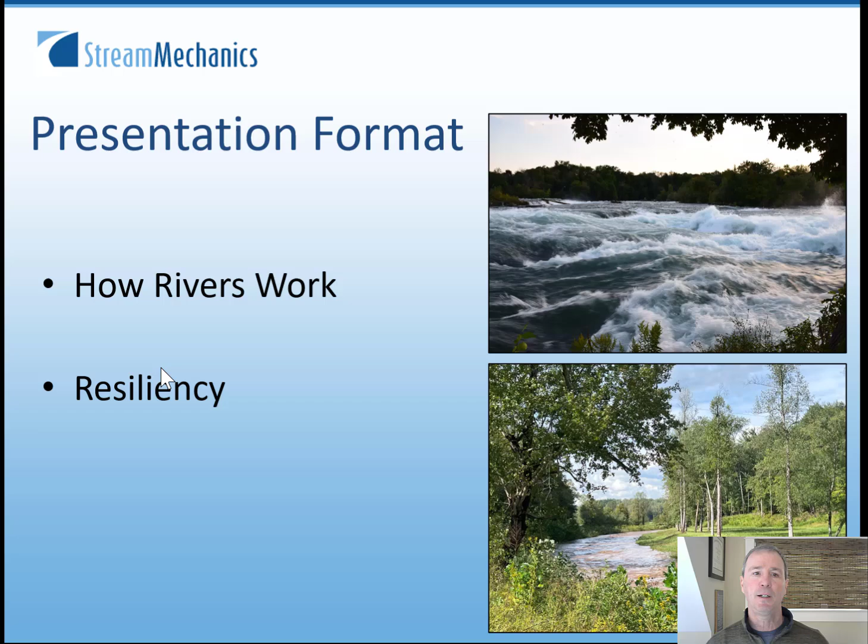This presentation format: I'm going to spend a little bit of time just on how rivers work, a very simple look at that, with a focus on how streams work during these big floods. Then after I get some fundamentals defined, we'll move into the resiliency part.

First I just wanted to talk about the power of water, because I think we've all stood beside a river at some point and marveled at the power of water. In this picture I'm standing beside Niagara Falls on the American side. The ground is shaking as this water pours over the falls.

In our world we can quantify stream power. This is one of the more simple ways to do it: we take the weight of water, which is pretty heavy, 62.4 pounds per cubic foot, times discharge, which is just the stream flow. In the picture, that volume of water moving over the falls is discharge, times the slope, which is just how steep the river is, the gradient. So as we increase discharge and/or increase slope, we increase stream power.

For those of us in North Carolina, we've seen some big floods in our state: Helene in the mountains, and not too many years ago Florence in the eastern part of the state. Both were very big flood events, but the behavior of the water was quite different. Florence was mostly in the coastal plain, so that water just kind of came up like filling a bathtub. It had pretty low power because it had such low slope.

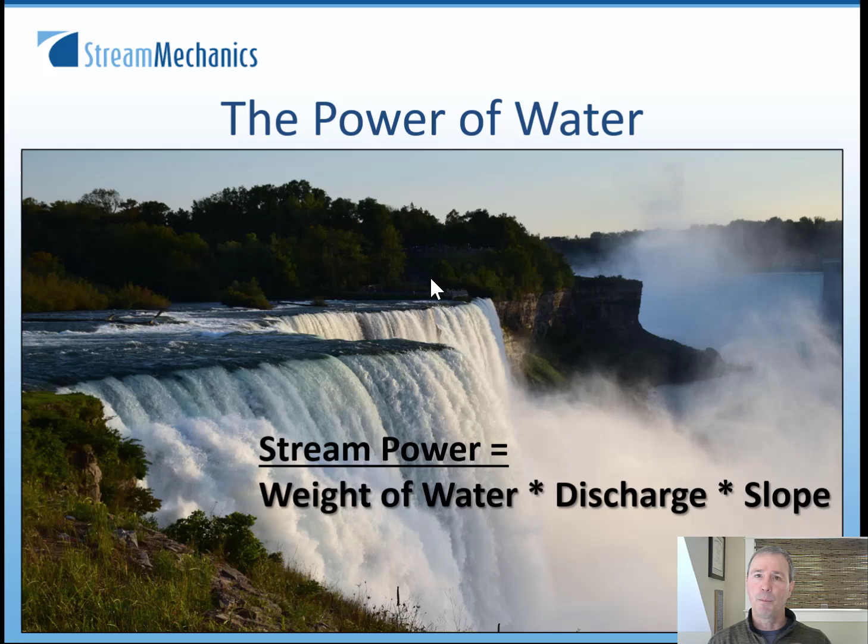Compare that to Helene, where we dumped almost 30 inches of precipitation at max onto a mountain environment with steep slopes. The power of that water was tremendous.

I also want to talk about an equation called shear stress - this is the last equation, only two equations in this presentation. Shear stress is a component of stream power. We have that weight of water again, shown as gamma, and we still have slope, that's the S, but now instead of discharge we're just focused on depth. Shear stress is a force we use a lot in stream restoration design, because we can manipulate the form of the channel and the floodplain to affect it.

Shear stress is a force. The lower that shear stress, the less force there is to move certain particle sizes. Low shear stress moves things like sand-size material, maybe small gravel. Large shear stress can move bigger gravels, even into cobble, even into boulder-size material, if that depth and slope are high enough to do it.

You can see an example of that in this slide, a little basket here. We went fishing for rocks. We had an event come through, a flow event. We came out after that flow event, dug through the sands, silts, and gravels in our basket, and that last picture shows the largest particles that were moving during that event. So that's really what shear stress is used for, the force for a given flow that can move particle sizes.

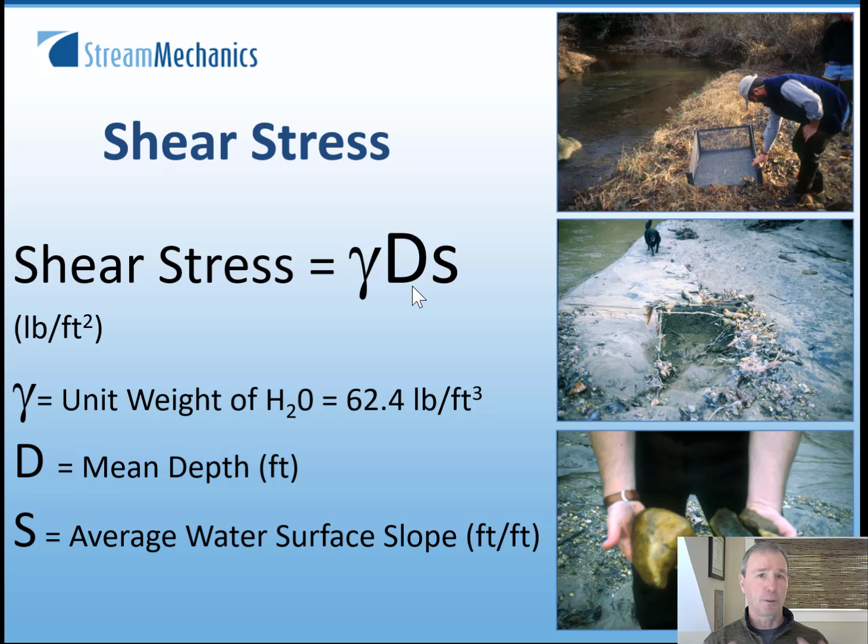So we start putting this together. With great power comes great, well, responsibility if you're Spider-Man, but if you're the river, it's sediment transport. Really, when we talk about sediment transport, we're talking about erosion and depositional processes. We think about these big floods as that water is increasing. We've got the precipitation event, runoff starts, water is flowing into our channels. The depth of that flow in the channel is increasing. It's increasing shear stress, increasing stream power, and we often get erosion of the stream banks, maybe erosion of the bed. In the case of Helene, we also had landslides that were bringing material in, and the river is working that material.

So there's a lot of erosion, especially on the front end and the peak of that flood. And then as the water begins to recede, stream power and shear stress go down, and we get a lot of deposition. Often after big flood events, when we're walking those sites, we see a tremendous amount of deposition in the channel and on the floodplain.

You can see an example of that here. This is from Helene. The picture in the upper left is before Helene. You can see a little bit of bank erosion, some material over here. And then after Helene, you can just see the massive amount of material that was deposited on that falling limb of the flood.

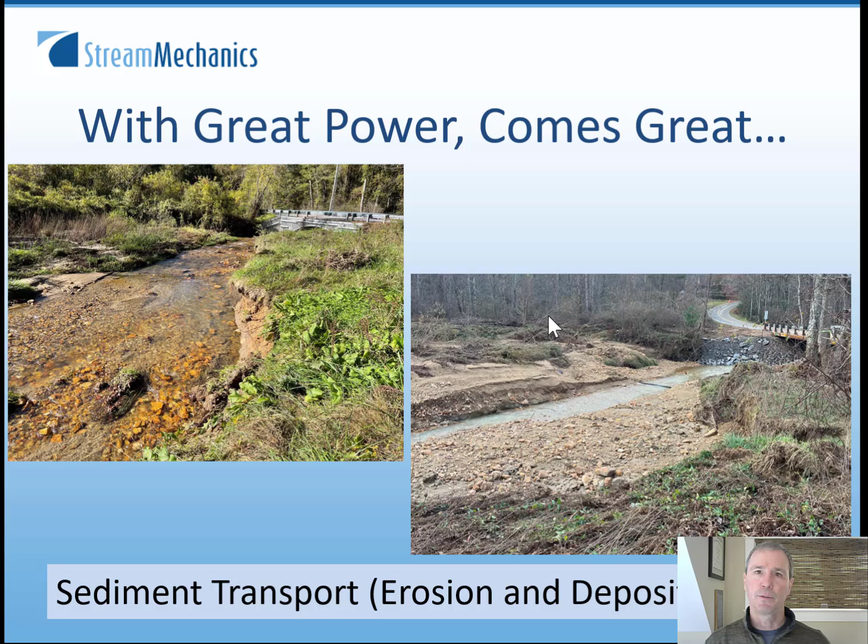All right, so I think this is a nice schematic to start putting these two things together. This is a diagram that was put together by Emory Lane in 1955, and it just shows that if we're going to have a stable channel, we have to have a balance between stream power over here on the right and that sediment size and sediment supply over here on the left.

So as we increase stream power, again either by increasing slope or increasing the volume of the water, this arm goes down and this little pendulum swings over to the degradation side. So too much stream power, then we often get degradation. I don't love the word degradation because we use it for a lot of things, but in geomorphology, degradation means erosion of the stream bed. It means the channel is going to get deeper than it naturally would be. Incision is a synonym for degradation in our world.

All right, on the other side, we have the sediment size and sediment supply. So if we keep stream power the same, but we increase the quantity of sediment and/or the size of that sediment, for example, instead of sand we're moving a lot of cobble or boulder, then this arm can go down and we move over to the aggradation side. That is the filling up of the bed with sediment, even depositing that material on the floodplain. That last picture was an example of aggradation. Again, we generally see both in these big floods: a lot of degradation in places, especially in the beginning part of the flood, and then aggradation as kind of the final result.

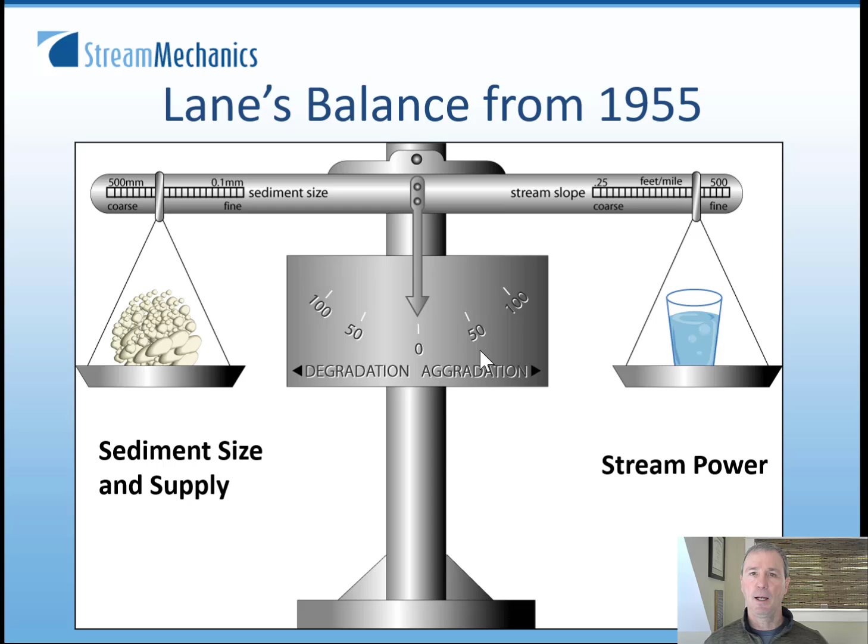All right, I also wanted to just touch on valley types, especially since I'm focused a little bit on the mountain environments, that the way this stream power plays out and really the effects of these big events does vary a bit by valley type. There are many valley types. We could spend all day talking about the different valley types that are out there. But just for simplicity purposes and to convey some of the points I want to convey in this talk, we're just going to focus on 3 valley types.

So the first is V-shaped. V-shaped valleys are generally headwater mountain valleys. They're fairly small watersheds, so small drainage areas, generally small volumes of water, but steep slopes. So the steep slope is kind of the higher part of the stream power equation, but the lower discharge is mitigating that stream power a bit. V-shaped valleys look like a V. They're kind of dominated by hill slope processes, so they're more vulnerable to things like landslides, hill slope failures, debris flows, and there's really not a floodplain that's part of these V-shaped valleys. As we move downstream, the valleys tend to open up. The slope comes down a bit.

The valleys begin to have more of a bowl shape to them, and we get these benches—little floodplain benches that form, but it's still pretty narrow. It's also still fairly steep, not as steep as the V-shaped valleys, but we have more water. So thinking about stream power, we're increasing the discharge component, but we're beginning to reduce the slope as well, to mitigate that power a bit.

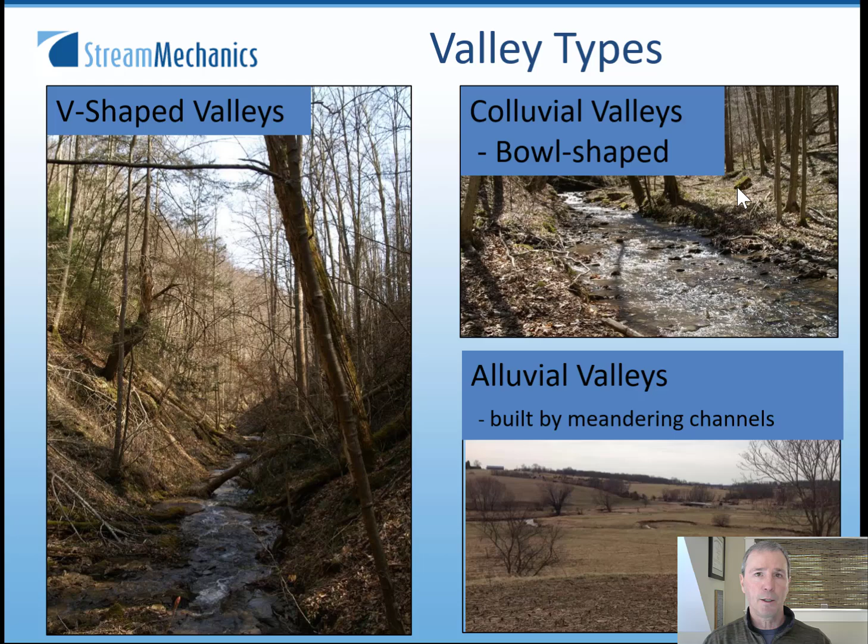As we get further down in our idealized watershed, we move into the alluvial valleys. You could think of alluvial valleys as valleys built by the river—these are the meandering streams. Alluvium is just the material deposited by the river. The valleys tend to be wider, the slopes tend to be flatter. So we're picking up more water—our discharge is increasing, but our slope is coming down.

Now I mention this because, as we were touring some of the streams in western North Carolina after Helene, we noticed devastation in all of these valley types, which is a bit unusual. Typically, those V-shaped valleys and the colluvial or bowl-shaped valleys are a bit more resilient to floods because they don't produce as much water. But when you get 20 to 30 inches of precip on these slopes, a multitude of processes come into play. So we saw really devastation in all three valley types, but they were slightly different.

This big picture on the right is the alluvial valleys—again, wider floodplains, a little lower slope, typically bigger streams and rivers. We saw extensive bank erosion in these systems, and we also saw what we call channel avulsions, where new channels were formed as either you got a blockage in one channel, or there was just too much power and it created a new channel elsewhere in the floodplain.

As we got into the colluvial valleys and the V-shaped valleys, we still saw avulsions. In many cases, the stream just began to take the full width of the valley, but we also saw increasing influence from landslides and debris flows in these valleys. So it was really a combination disaster of landslides, debris flows, and flooding.

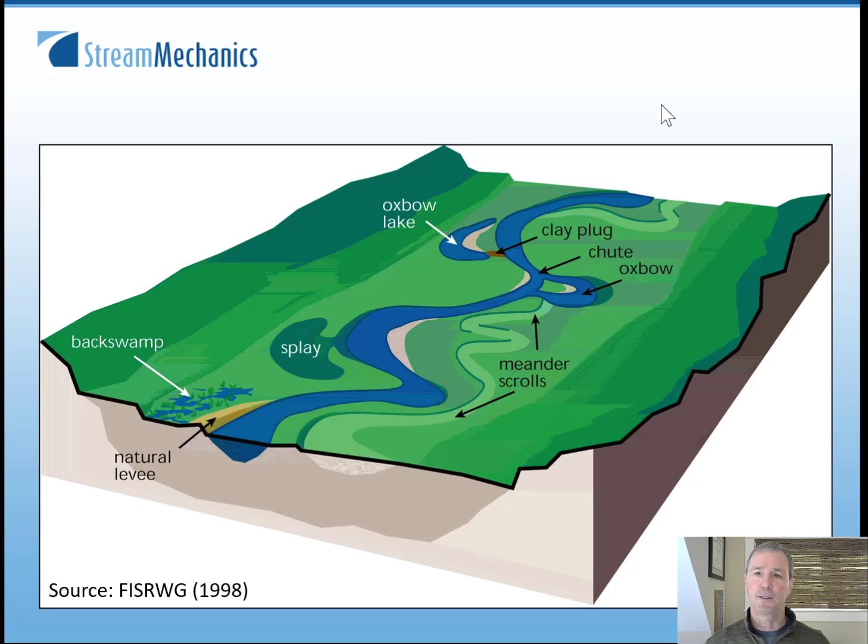But since we straighten the stream, it increases the slope, which increases the shear stress, and typically the result is degradation. So most of our streams in North Carolina, and frankly across the eastern United States and most of the United States where there are alluvial valleys, our streams are incised, or deeper than they should be, and can carry a lot of shear stress when those channels are full of water.

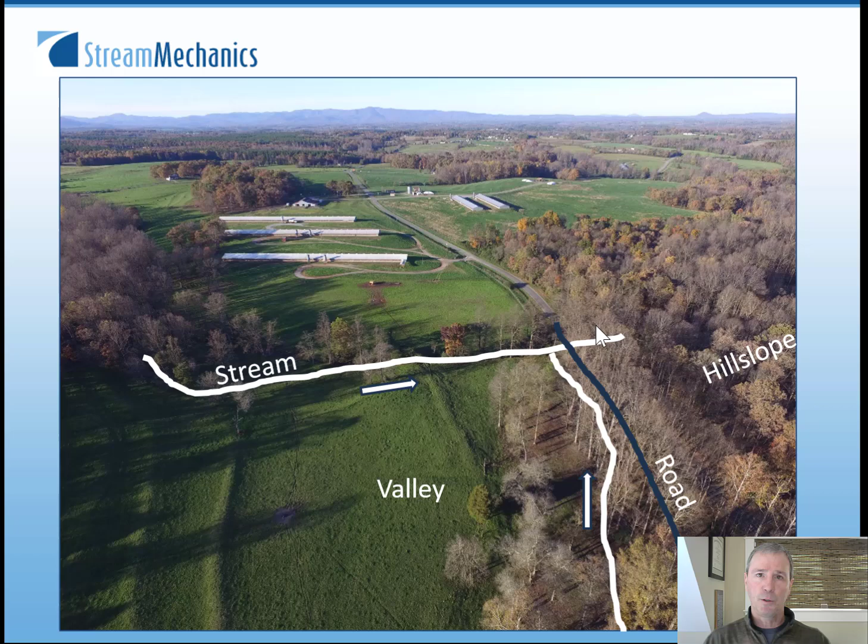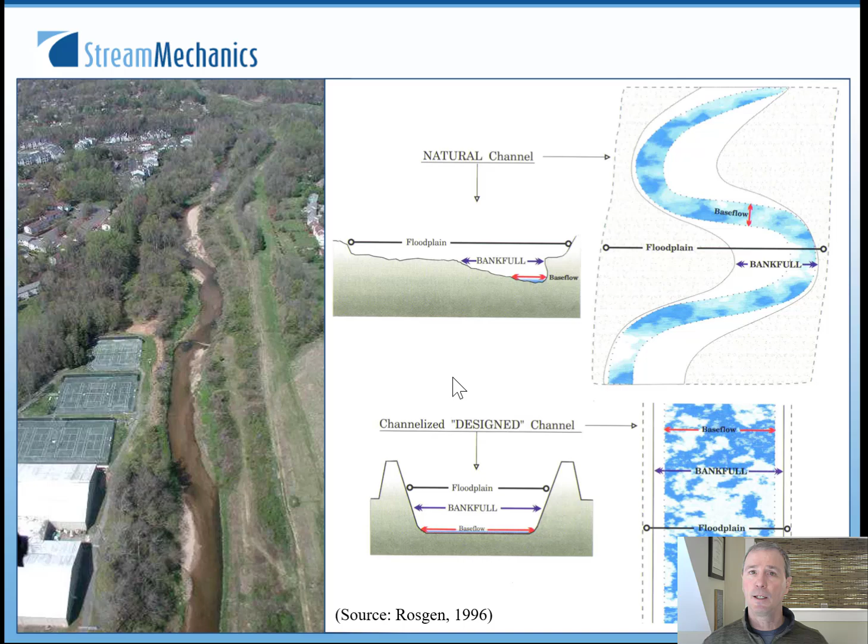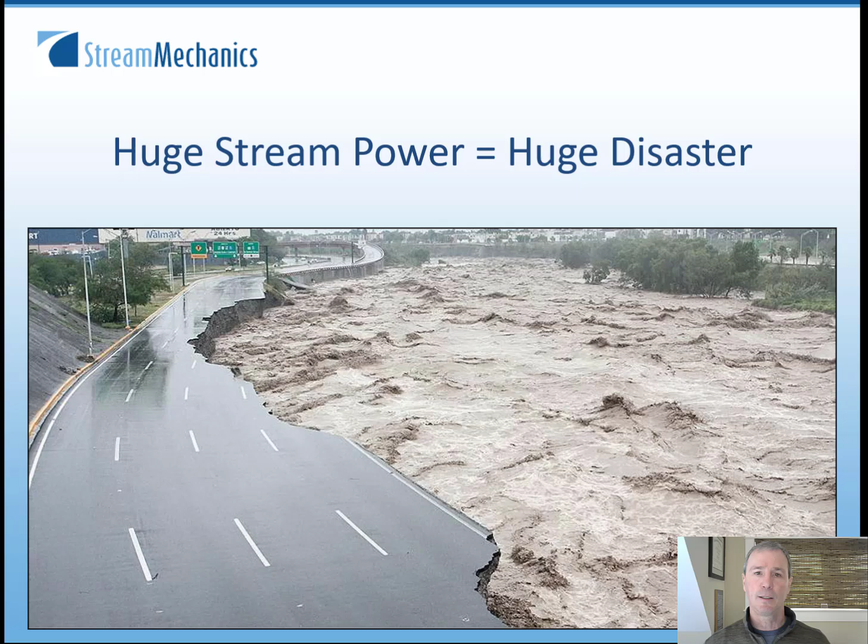All right, so that was a little bit of the processes that I wanted to convey in as simple a way as I know how to do. And so now we're going to get to the question at hand.

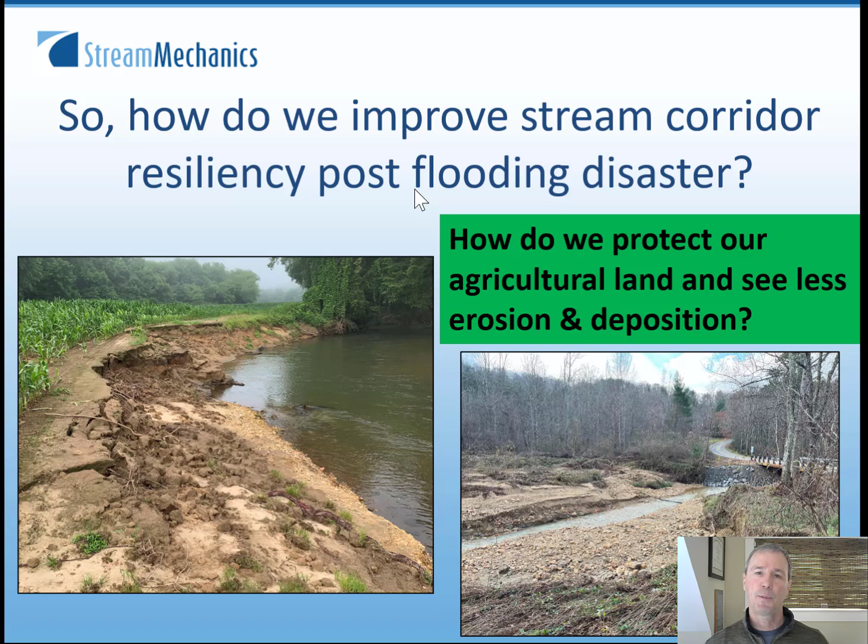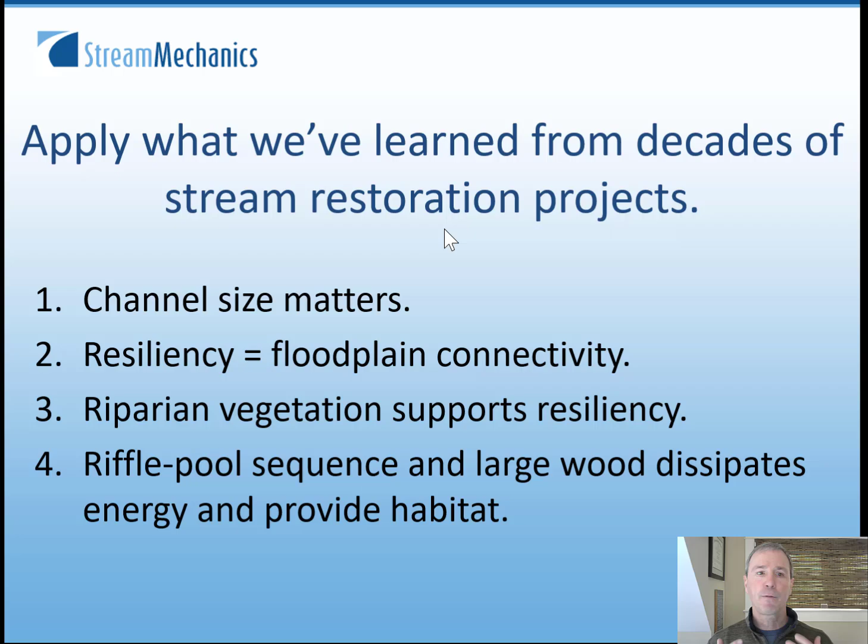So I'm going to offer 4 steps for doing this, just based on lessons learned from decades of stream restoration projects. I'm going to walk through each of these, but the first one is that channel size matters. The second is that if you want to just simplify all of this, resiliency equals floodplain connectivity, and I'll show you why. Third, riparian vegetation supports that resiliency. And fourth, a riffle pool sequence where we can incorporate large wood further dissipates energy and provides habitat.

So the first one is just channel size matters. We showed that schematic of that bankfull channel. When possible, when we have channels that have been destroyed or altered and we've got to go back and manipulate that channel, build bankfull channels, and then put the flood flows on a bankfull bench at a minimum, and preferably on a floodplain. This is really easier than it might sound if you're fairly new to this.

Because if you know the drainage area of your project, you can get the bankfull dimension. This is a for sure statement in North Carolina - we have these curves and equations throughout the state, and in many other states we have this as well. So it would be one thing to check. But if you know the drainage area, you can get that bankfull dimension. And getting the drainage area is getting easier and easier.

There are desktop tools to do both. You can just click on the site that you're working on, and it'll give you the drainage area. You know the drainage area, you can get the proper size.

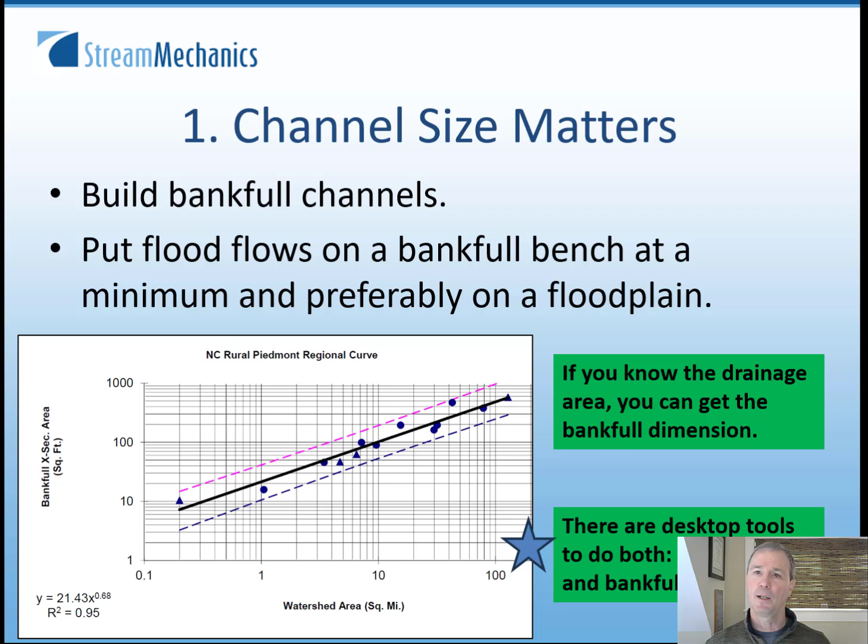So I just want to show some examples of how this plays out in the field. This is an example of a project that had a dam failure. So there was a dam here, and the remnants of Hurricane Michael several years ago, this is in Surry County, North Carolina, took that dam out. So this was a project where the new channel had to be built through those sediments that had accumulated behind the dam. And in the foreground here, you can see that bankfull channel.

In this case, the channel had already built to bankfull, so the folks were able to just kind of take this template and apply it upstream and build a bankfull width, a bankfull depth, and then build this bankfull bench. So it's not just sloped straight up to the top of bank, and there are not levees put in as well.

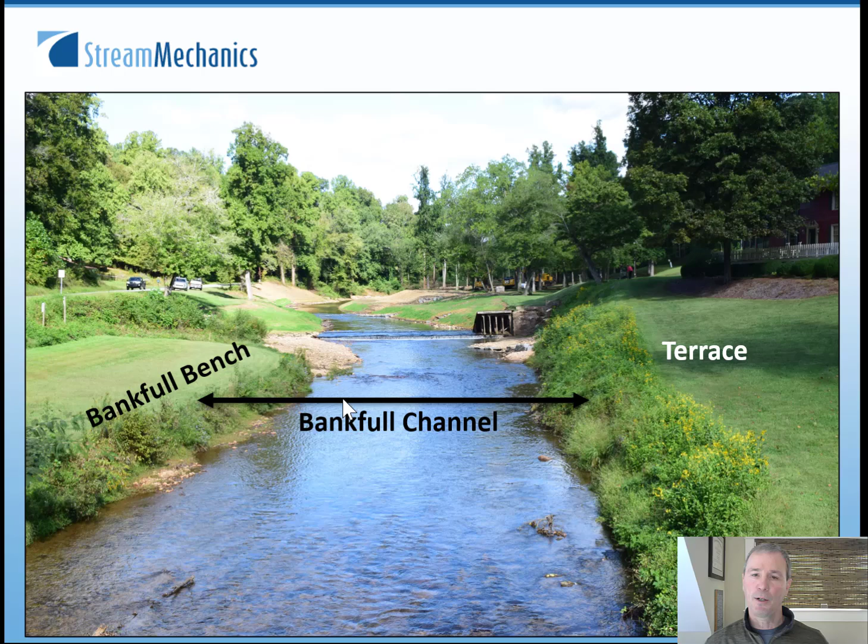This is actually the Friday that Helene hit, and this particular county is just in the foothills of the mountains. It did not get as much precipitation as up in the mountains. We did get about 12 inches of precip, but it was between Wednesday and Friday, so it was certainly not as big as some of the bigger tropical storms that have come through our system.

But it's almost right at bankfull flow here. Bankfull's right here. You can see the faster moving water in the channel, and as water hits that bench, look how much lower or slower the water's moving on the bench. And then here was the high water mark from Helene.

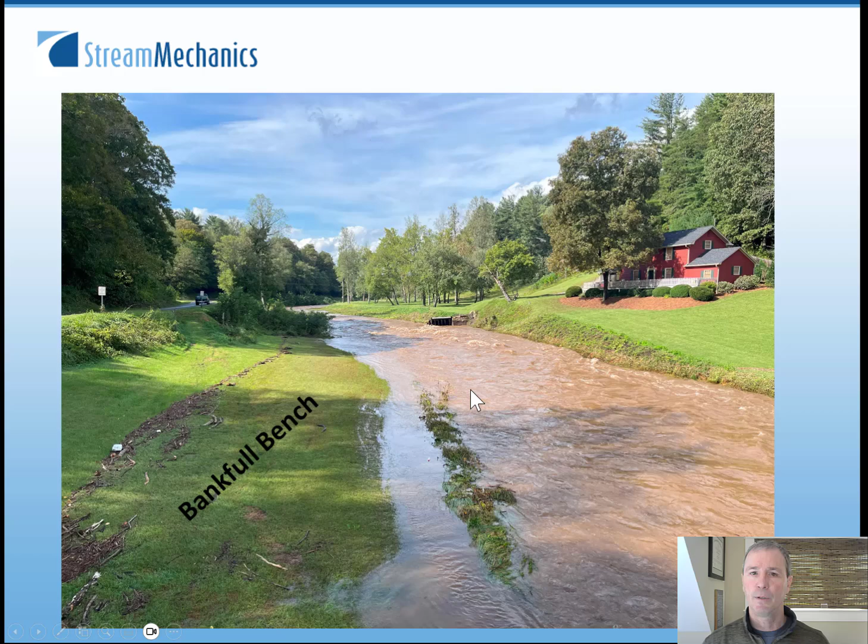Unfortunately we see a lot of this in western North Carolina right now, and it's understandable. People are just trying to survive, trying to get their land back, trying to protect themselves from the river. It seems like taking that material from the channel and piling it up on the banks to make levees that keep the water in the channel seems intuitive, right? It seems like the right thing to do, but it does not work.

The reason it doesn't work is that as we get those moderate to larger flows coming through here, we're maximizing shear stress in the channel. All of this unconsolidated material, this mixture of sands, silts, gravels, and cobbles without any soil or root material or trees to hold it in place, is just going to erode back into the channel.

It'll aggrade, begin to fill up with sediment. Additionally, this type of activity will cause flooding downstream. You're taking that water, and instead of spreading it out onto a floodplain, it's moving downstream and could flood others as well. It's also potentially a permit violation.

So there are certain things we can do post-disaster in a channel to get that initial recovery, but only to a certain point. So there's a permitting question with this as well.

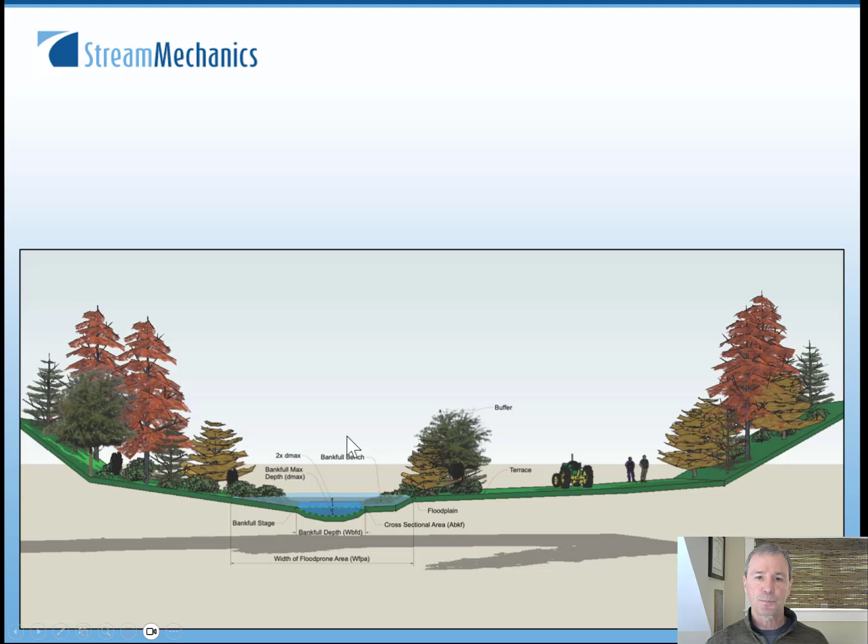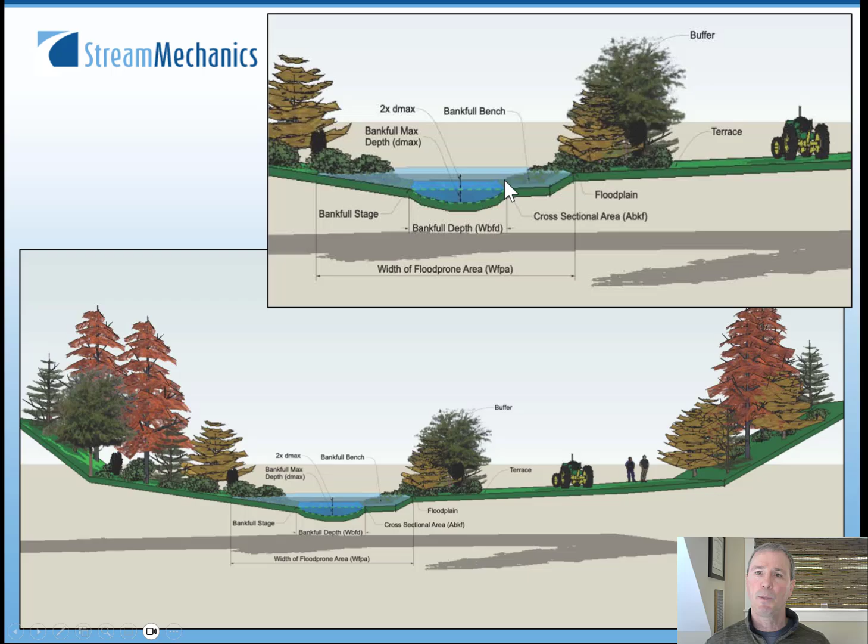But at a minimum, we could get that bankfull channel built, a bankfull bench. We're going to talk about the riparian vegetation in a few minutes, and then we can continue to farm the valley outside of that area. But reducing that bank height with this bankfull bench is really a key component.

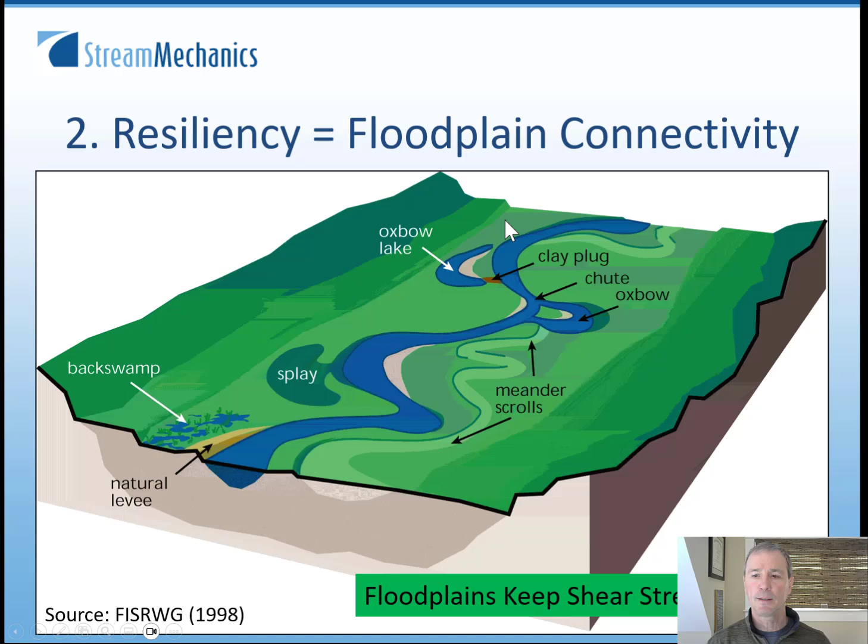All right, so number two: resiliency equals floodplain connectivity. And the reason that it does is that floodplains keep the shear stress low.

So here's a project in Banner Elk, North Carolina. This is in a county that was hit hard by Helene. This project was built in the early 2000s. It is on a farm. This part of the project was fenced out. This part of the farm was maintained as pasture land and some other ag uses. And then this part of the farm was turned into a development. But we can see a couple of things.

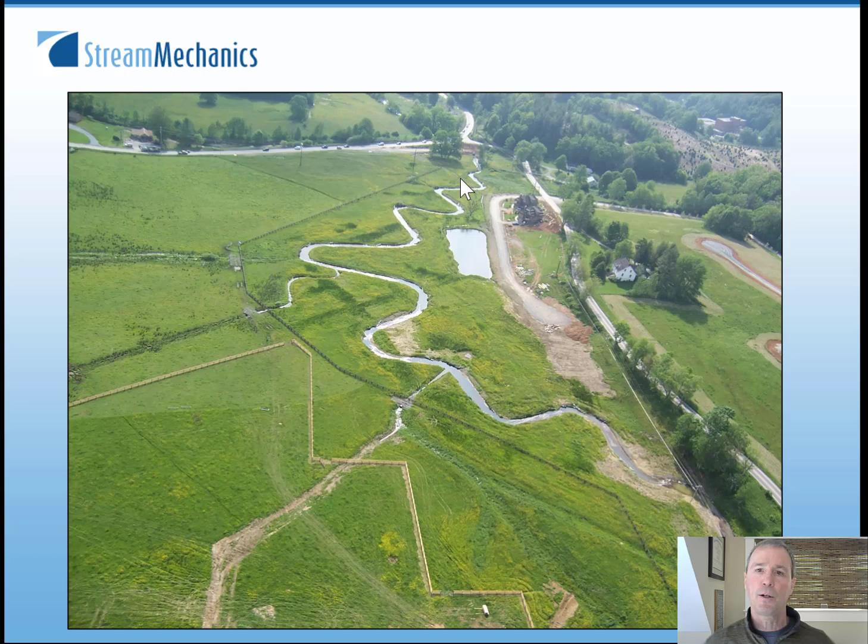We have that step one, so this is a bankfull channel. So all flows greater than bankfull can now spread out onto a wide area. In addition, there was a meandering channel put back in place, which reduces slope. So we're reducing that stream power and shear stress in two ways: by accessing the floodplain at more frequent events, and by spreading that water out onto the floodplain.

Well, there's a law with stream restoration called Murphy's Law, and Murphy's Law states that as soon as you build a stream restoration project, you will get a large flood. So a couple of years after building this project, the remnants of two hurricanes came through this site within a week of each other - Hurricanes Frances and Ivan. And you can see that event occurring here.

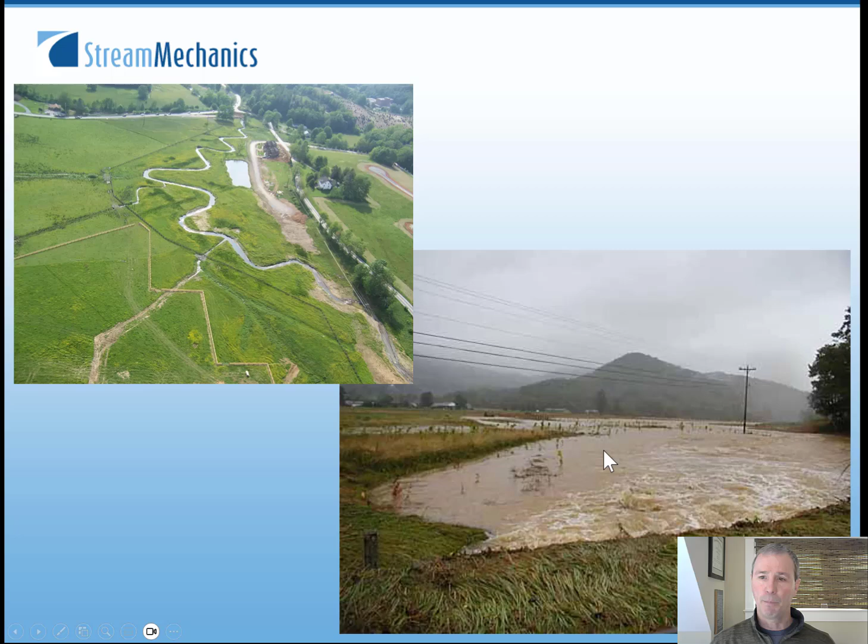This is not quite the peak. The water did go over the road, but it's still obviously during the event. What I want you to notice is the velocities and shear stress of the water on the floodplain. It's pretty low because we're spreading water out. When we spread water out, that increase in depth is minimized. So we're minimizing shear stress on the floodplain the wider we can make that floodplain.

Compare this picture to the one we showed before, where we're concentrating all of that massive flood event into one channel, trying to contain it. So this is why I say floodplain connectivity equals resiliency. We kind of don't care how much more water comes down through this system because we're just spreading it out onto a big floodplain.

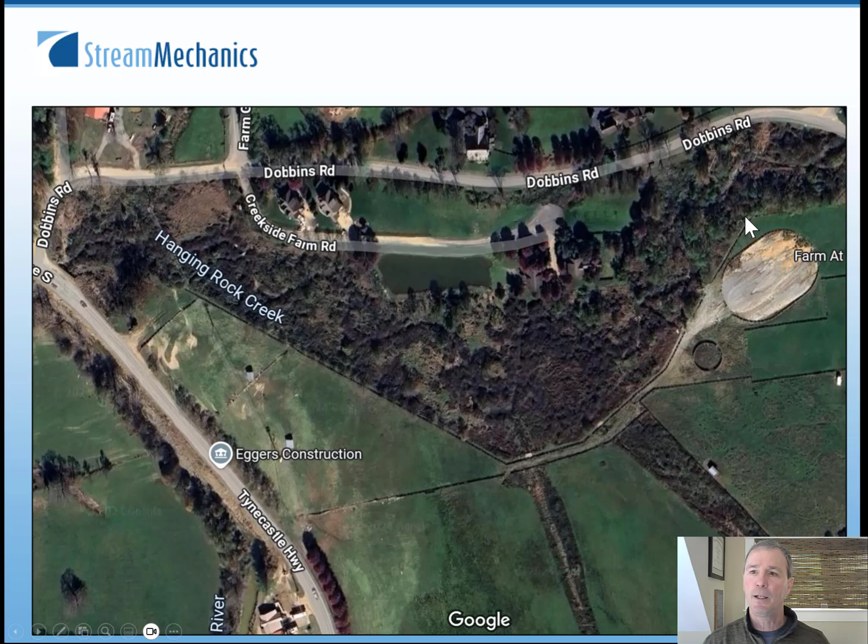And then here's that same project after Helene. So you can see 20 plus years of vegetation growth. The only real evidence you can see from the aerial of Helene is this riding rink, which had a lot of gravel washed from the rink into the riparian area. And then in a lot of places, the fence was damaged.

But when we walked that site post-Helene, walking the stream, honestly you couldn't tell a flood had been through there. The pools were still deep. The bed had not aggraded. We saw fish in this pool. There were beaver dams in one section of the stream, and the beaver dams were still intact - they had not even washed away. We had these good wetland features in the floodplain that were enhanced by the beaver activity.

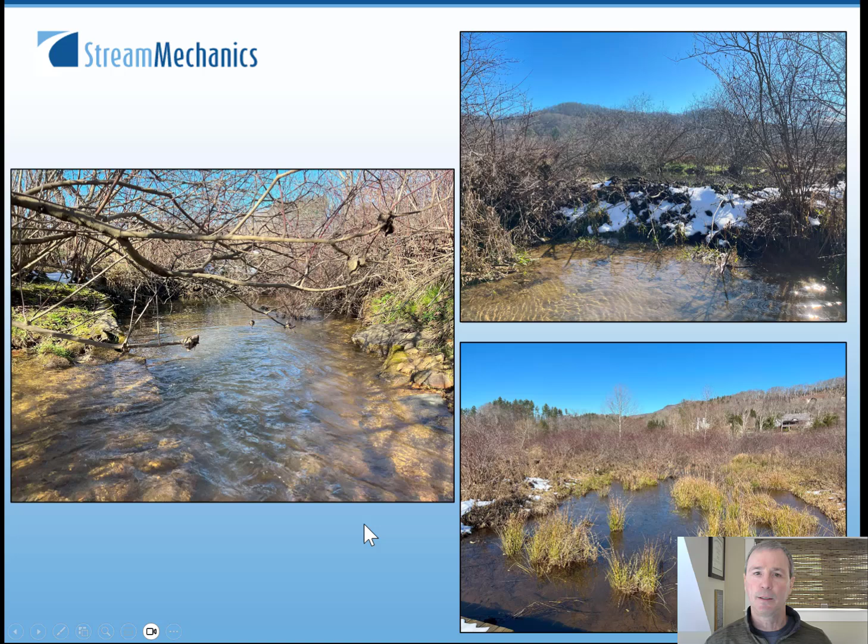Okay, so we've focused on building our smaller channels, number one. Number two, connecting those channels to the floodplain. And number three, we want to bring in reinforcements. And the reinforcements is that riparian vegetation.

We're going to focus from a resiliency and stability perspective on the fact that vegetation provides bank stability of the stream banks itself, and then it slows water on the floodplains. But there are other ecological benefits as well. It cools stream temperatures, which in western North Carolina is important. We have a lot of cold water streams that support cold water fish, and helping keep those temperatures low is important for those species.

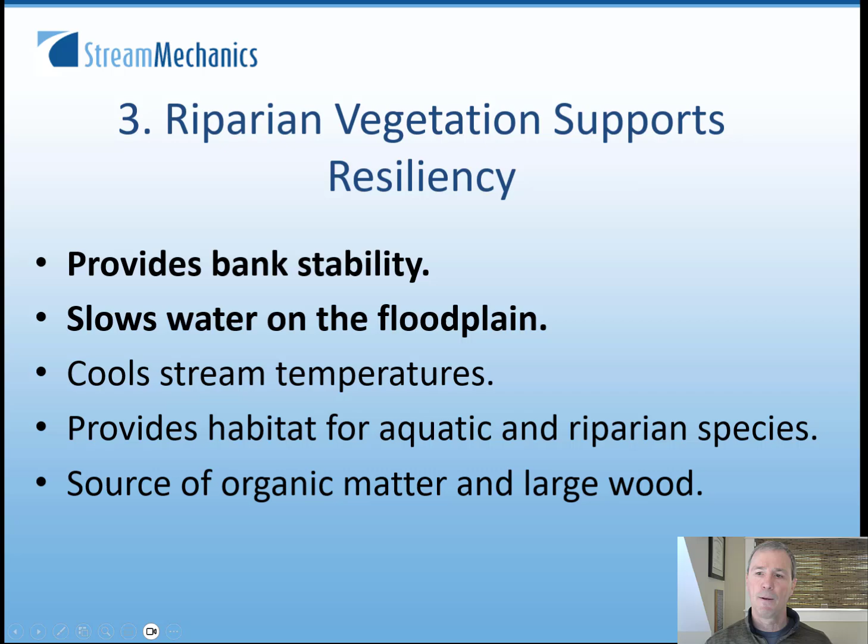It provides habitat for aquatic and riparian species, and then it is a source of organic matter and large wood. The organic matter is primarily the leaf material that gets into the stream. It's an energy source, a food source for many of those aquatic organisms. I'll talk a little bit more about the large wood in a few minutes.

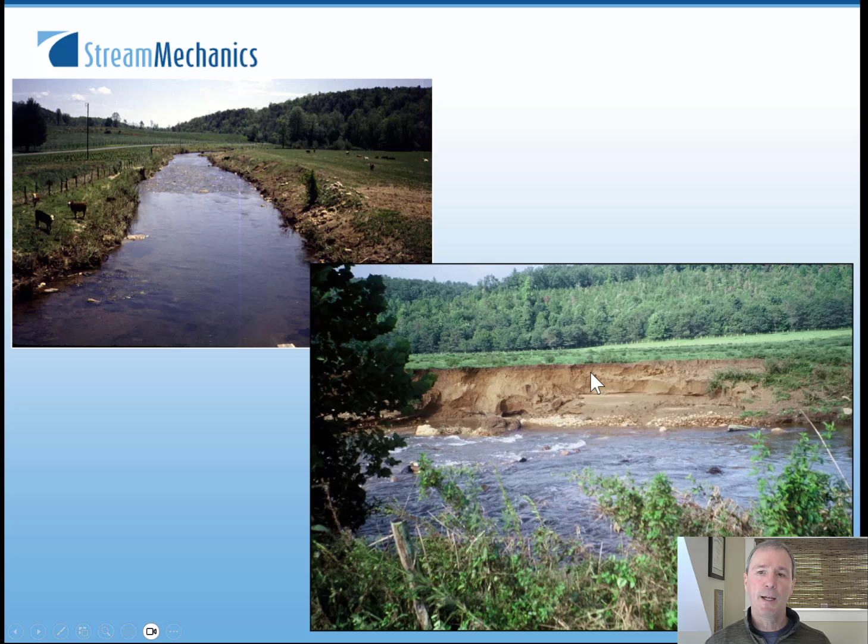So here's an example of this playing out. Here's another farm, this one in Surry County, before the cows were fenced out. We're standing on a bridge looking downstream. This bank is very tall, and over time the erosion became extensive on this project. But notice the bank heights - it's very high. Riparian vegetation is very important, but first reducing that bank height is key.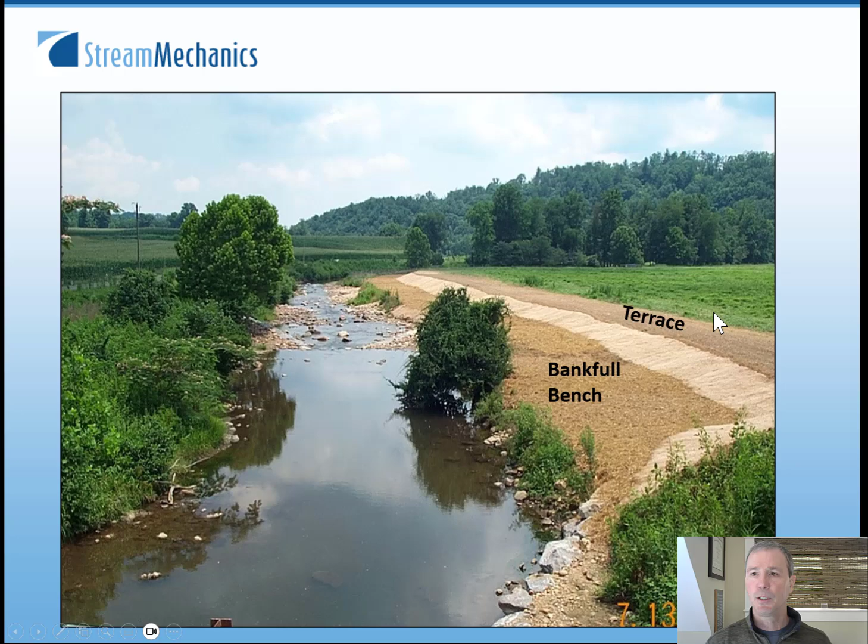So the first step here was back to step one, getting the bankfull channel built by finding that bankfull elevation and then building a little floodplain bench. In this case, we couldn't take the whole valley, only a small section of the corridor. So here's the bench - it sloped up to a terrace, and the terrace was maintained in pasture land.

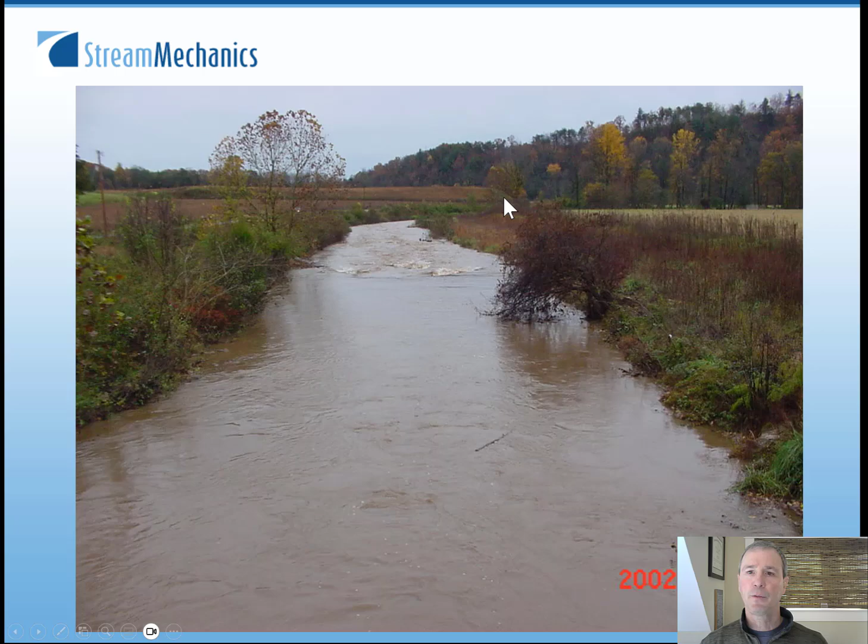A couple of years later, you can see that riparian vegetation beginning to grow, mostly herbaceous vegetation at this point. And then 20 years later, we have a very nice riparian forest.

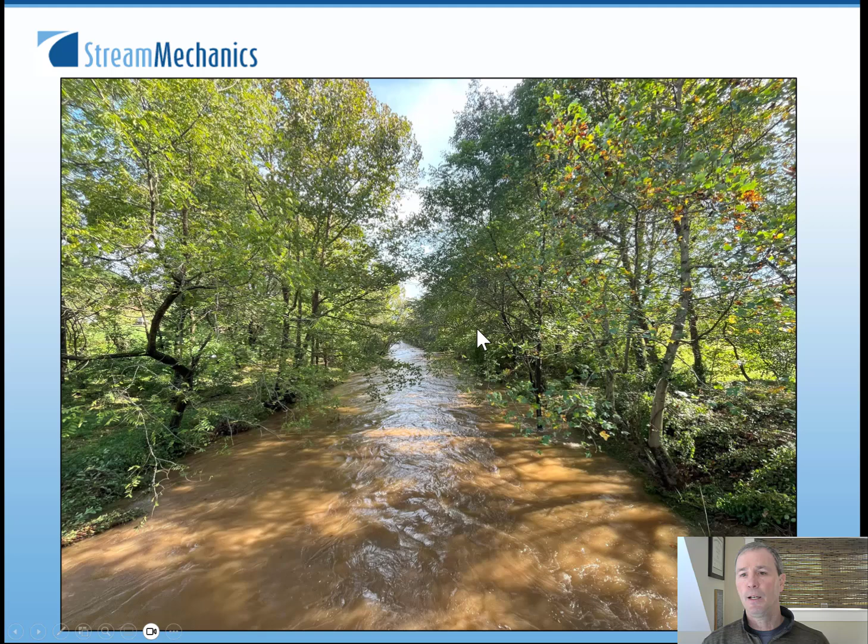But I just want to point out the trees that have grown on the right side were able to grow from that bench. So we're getting root mass down near the toe of the bank, which is key, because if we're talking about bank stability, it's a bottoms-up approach. We have to first have a stable bed, then a stable toe, and then we can achieve a stable top of that bank. So having these low bank heights and this bench really helps us maximize the benefit of that riparian vegetation.

And here's just an aerial shot of that. All those pictures were taken from this road looking downstream. So we had our bench, and here's that pretty thin layer, thin width of riparian vegetation here, but it works because the ag area is on a terrace, a higher elevation than the floodplain. The floodplain does have that bench, and it has good vegetation.

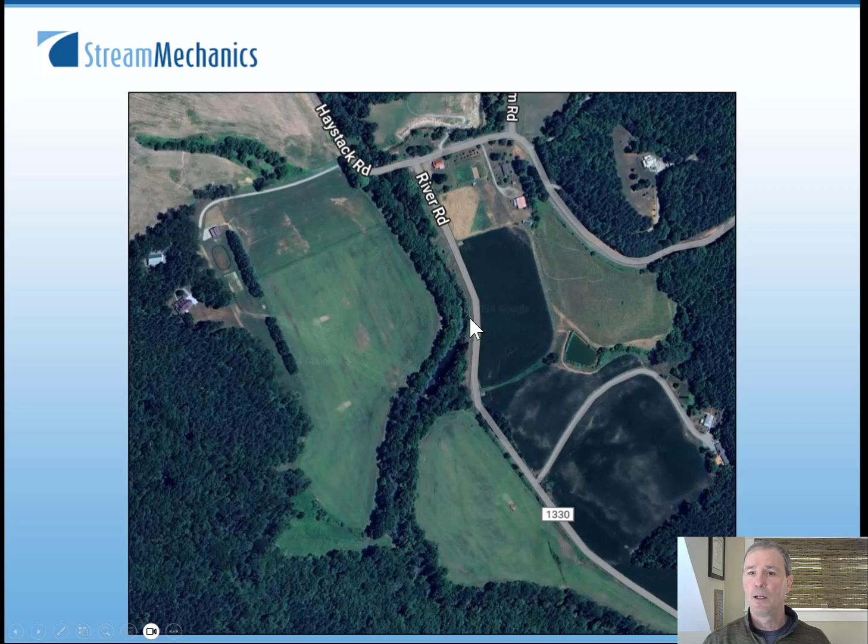One thing this picture doesn't really show - this section was pretty straight, so really all we had to do to get vegetation was plant. But when you get into bends, like a meander bend, we have more stress on the outside of that bend, and so we often have to use other techniques for stabilizing this portion of a stream.

So I just wanted to acknowledge there are numerous methods for stabilizing banks that incorporate wood and natural materials. This example is toewood, where whole trees, root mass intact with trunks and tops of trees, are used below the stream bed up to the base level to create that stable toe. In this example, transplants were placed on top of the wood to hold it in place and make up the stream bank. And then there are bioengineering methods.

This one is called geolifts, where you take these soil lifts and fabric, like a coir matting, and in between those lifts we put live cuttings. It's a pretty robust method for building stream banks and meander bends - it can withstand quite a bit of shear stress and velocity. There are numerous methods for bioengineering to go along with this; I just wanted to point out a couple.

One reason I wanted to point this out is as we were touring these sites in western North Carolina post-Helene, we saw all of these facilities bringing massive amounts of woody debris, these trees, to a site to get mulched. It was painful for me to see that, because just beside this particular facility there was a farm with all this bank erosion from Helene.

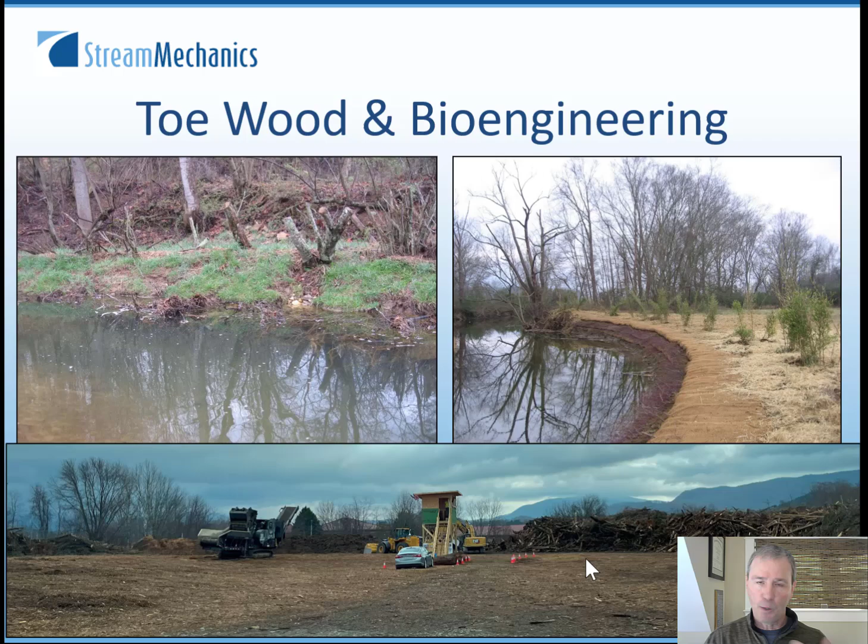We could have used the trees from this material to create what you see in these upper pictures. There's a lot of logistics involved in that, and some complications, but the more we can do that, the better. These floods produce a lot of woody debris, and it is debris that we can use in the restoration, reclamation side of things.

The last thing I wanted to mention is that the riffle pool sequence and large wood further help dissipate energy and provide habitat.

Here's another project on a farm, where they gave the entire valley width back to the stream, and then maintained their pasture land up on the hill slopes and terraces.

I'm still primarily focusing on the alluvial valleys and meandering streams for this presentation. But what I want to point out is when we have this opportunity and can put this meandering pattern back, pools will form on the outside of the bend, and the riffles form between the meander bends in the straight sections.

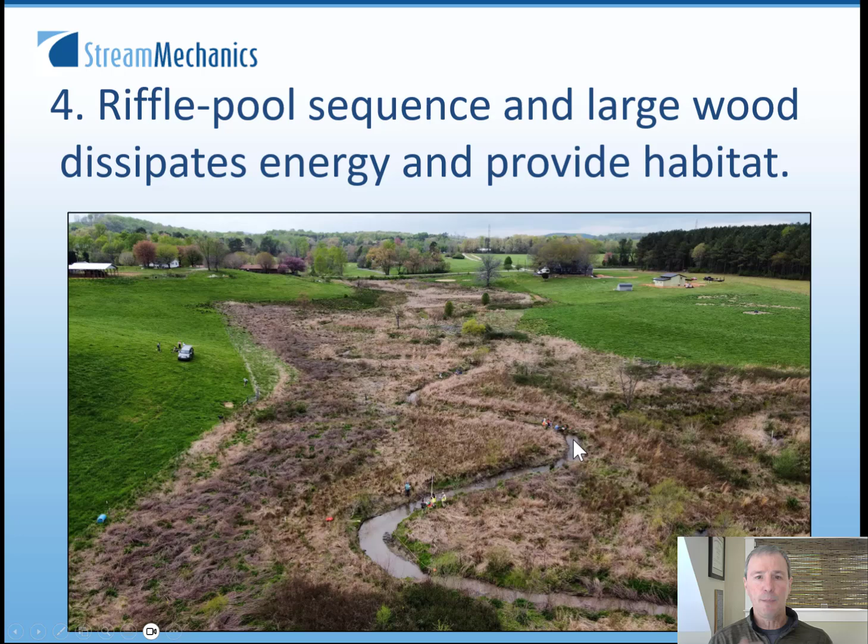These riffles are the natural grade control feature for the river. That's what's helping us maintain the floodplain connectivity. And then the pools, by being deeper, are also helping to dissipate energy.

And then I mentioned the wood as well, so I'm just going to zoom in. This is a younger project.

You can see here are the riffles coming into the pools. Here's another riffle. So a combination of rock and wood are used to achieve that short-term stability. But the wood is anchored in place, so it's not wood that's just going to mobilize during the big events.

One thing I like about this picture is you can kind of see all of the steps we've talked about coming into play. This channel was built as a bankfull channel, so all flows greater than that bankfull flow are going to spread onto the floodplain. So there's the floodplain connectivity.

Riparian vegetation has been planted. It's just a young project, so you don't see much, just the herbaceous. And then here's that riffle pool sequence, providing both the stability but also the habitat.

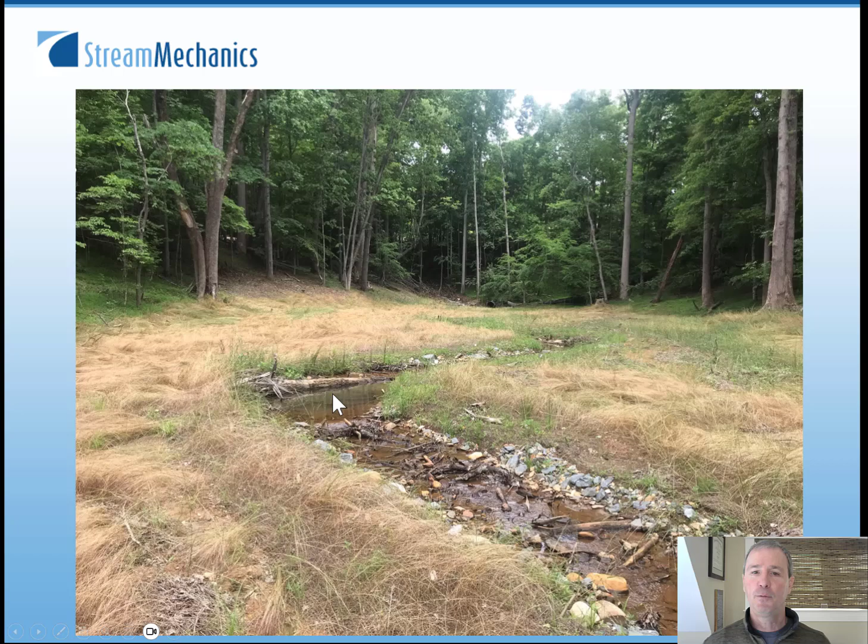Pools are really important for fish. The riffles are really important for macroinvertebrates. That's a bit of an oversimplification, but for generalization purposes, you could think of fish in the pools and the bugs in the riffles. And then here's a little more mature project, same kind of thing.

Here's that pool. This is a toewood example. So all of this is actually wood that was put in, and then transplants above that.

And if we do all this, it not only provides resiliency for the human uses that we want onto that floodplain, but it does support stream corridor function and habitat for aquatic life.

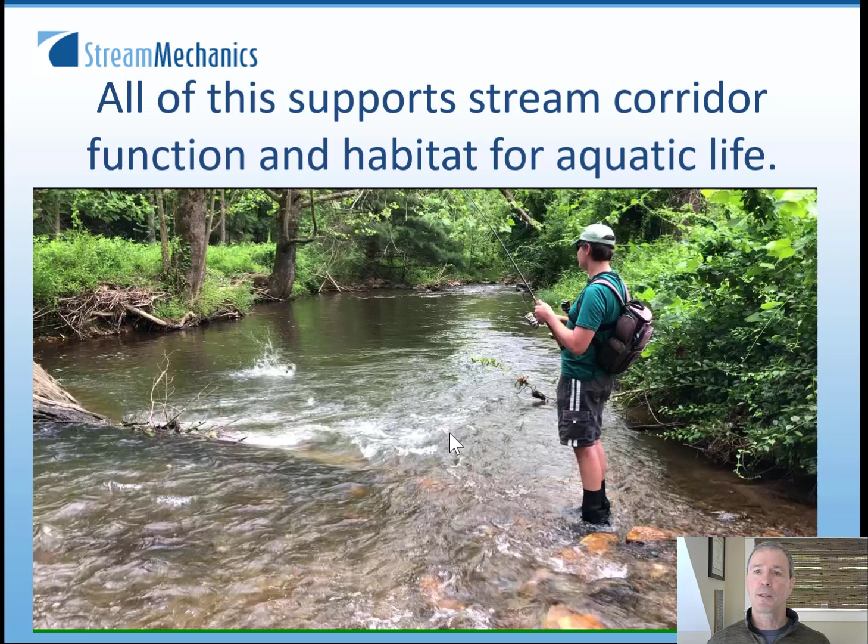So from a recreational perspective, it provides better fishing. But beyond the recreational component, all of these things help improve the biodiversity of the stream and the floodplain. And we've lost a lot of our aquatic and riparian species over time through habitat loss.

So in doing these four steps, not only can we improve the resiliency of the system and provide more stability to our ag uses, for example less erosion, less deposition, but we can provide a home for the aquatic wildlife that lives there, both flora and fauna, and hopefully see these species continue in our lifetime, and that future generations can see and appreciate as well.

So in summary, to rebuild these stream corridors that are more resilient to large floods, do the following. Build those bankfull channels. Connect those bankfull channels to at least a bankfull bench. We can almost always do that.

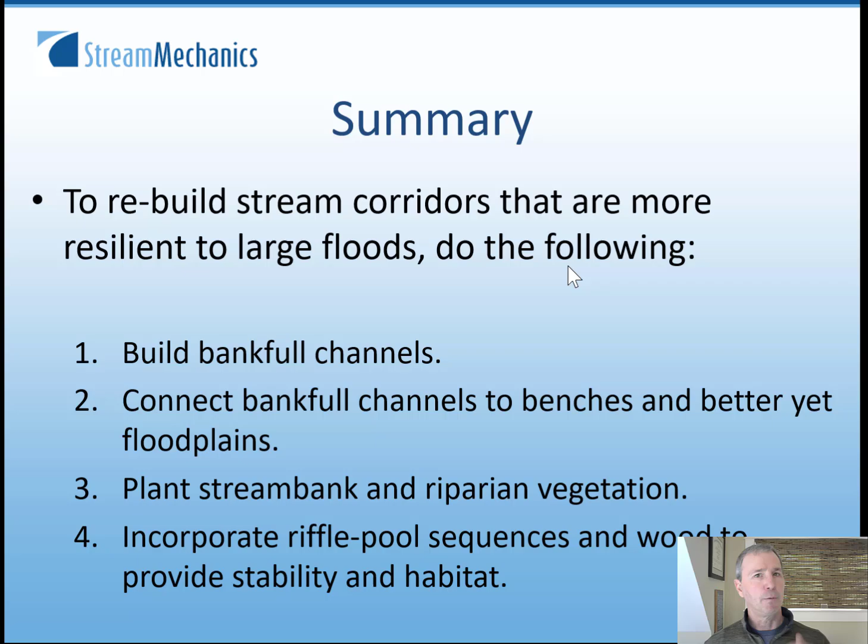And better yet, connect it to the floodplains, plant that stream bank and riparian vegetation, and then when possible, incorporate that riffle pool sequence and wood to further enhance stability and also provide that aquatic habitat.

And I just wanted to let those, well really anyone working in ag environments across the country, and you're working within NRCS and soil and water district programs, there are resources available. Like everything that I have shared is in the National Engineering Handbook, NRCS's National Engineering Handbook, Part 654. It is a huge document.

In North Carolina, there's been a lot of focus historically and currently on Chapter 11 of this engineering handbook, which is the Rosgen geomorphic channel design. And there's even been kind of enhancements and evolutions off of that method for today.

I mentioned bioengineering. There's an entire technical supplement in this design manual on bioengineering, and there is help available. So again, in North Carolina and really the other states, there's an engineering services section. The engineering services section in North Carolina for the Division of Soil and Water Conservation is very active and helpful in these methods.

There are NRCS programs that can fund these types of projects as well as provide technical assistance. And then there are many engineering firms that have technical service providers, which is a requirement for NRCS to do these methods. So there is help available if folks want to do this.